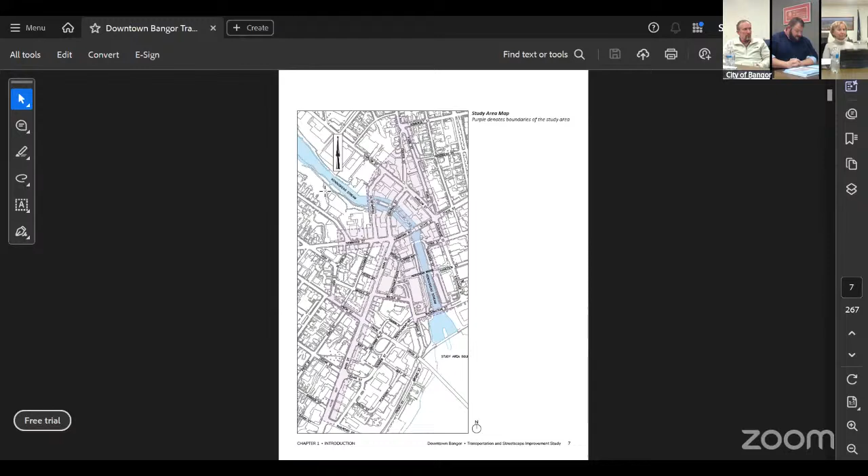I guess what I'm going to do is just do a high level overview, show you what we have discussed, and then show some examples. Can you go to page 31?

I just wanted to show this image, because this is that circular core that Jeff was talking about - Central, State, and Harlow Street, that kind of loop.

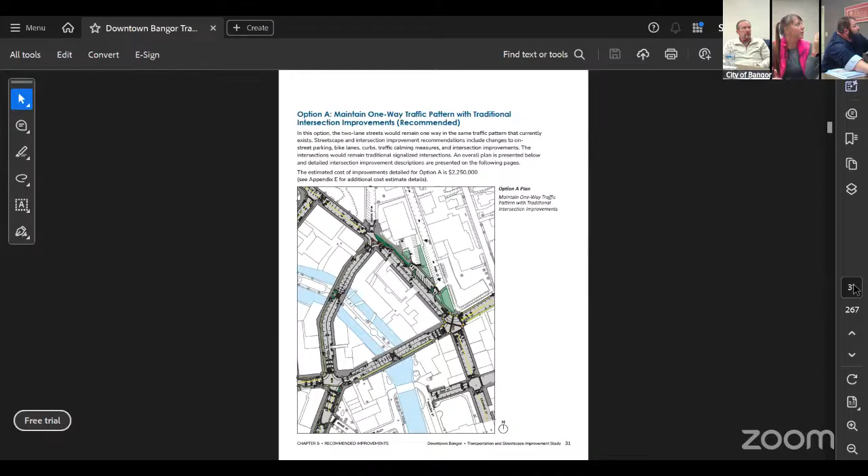In this section, we chose to recommend one-way traffic with the traditional signalized intersections as it is today. With this, we would include streetscape and intersection improvements.

Changing the parking from angle parking to parallel parking all the way around the loop. We would include traffic calming measures, which would be narrowing up the lanes, adding curb bump outs near the intersections.

and near crosswalks. We also included some raised crosswalks along the stream there on State Street and Central, just past Bagel Central. Raising those and having a protected curb bump out area just to increase the visibility of pedestrians, and it also helps the traffic.

I'm sure you guys have driven down there - it's kind of a free for all. Once you turn on Central, everyone's like, what lane do we go in? We kind of stay in the middle until you decide at the end, and then you go from there.

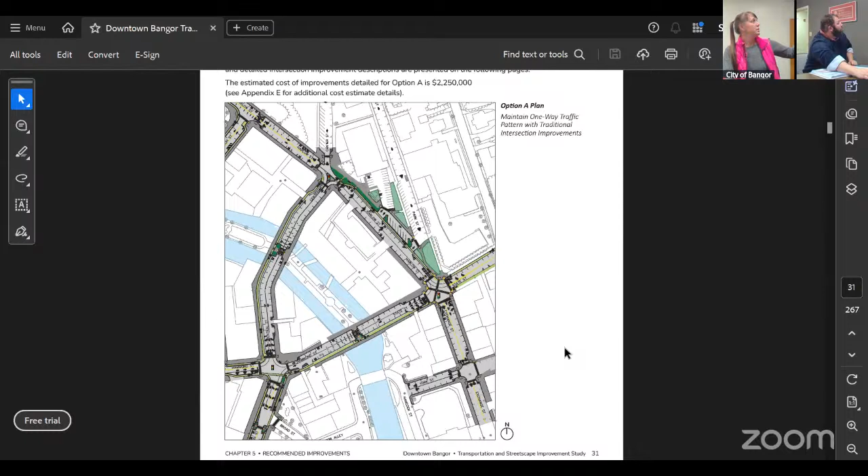So we did that. We also added bike lanes with bike boxes. Bike boxes are at the intersections. The bike lanes are next to the sidewalk, so they're between the sidewalk and the parking. And then we'll have a bike buffer in between the parking and the bike lane, for door swinging, to give the bikers a little bit extra space, plus people pulling into parking.

Those are bike boxes - it goes in front of the intersection so that the bikes have an opportunity to get out, make their crossing, and get into the proper lane on the other side, into the bike lanes. We also proposed some bike racks strategically placed downtown.

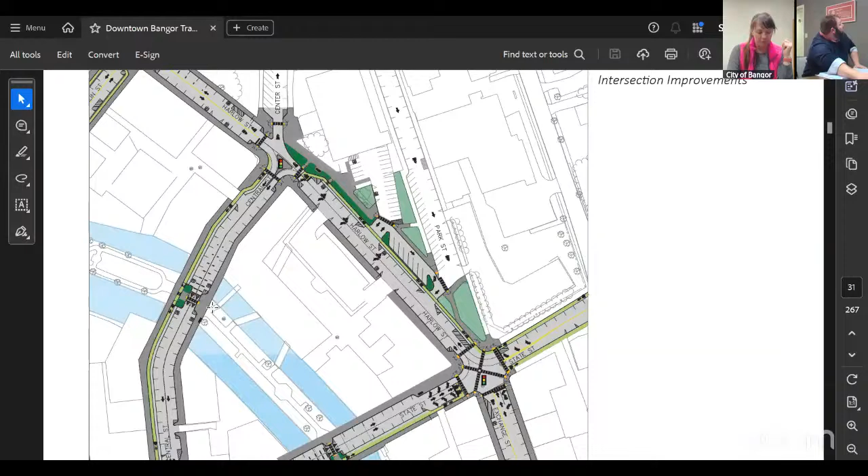What else did we miss? And then just general intersection improvements, which includes improved crosswalks like the paint or the detectable warning fields, if they need button replacements, things like that. So let's see.

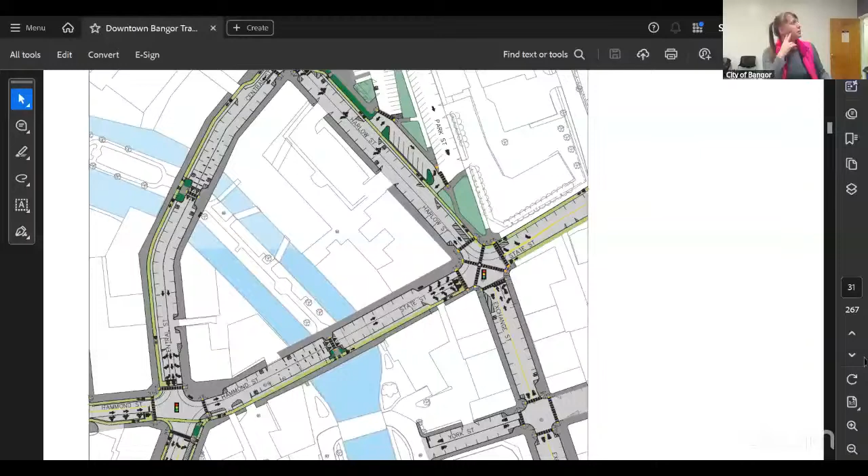Go to page 33 for a second. I just wanted to show the bike boxes like Jeff was talking about, just so you can see those. And then it also shows the curb bump outs a little bit better on this sheet, so it makes those crossings shorter for the pedestrians, instead of being wide open.

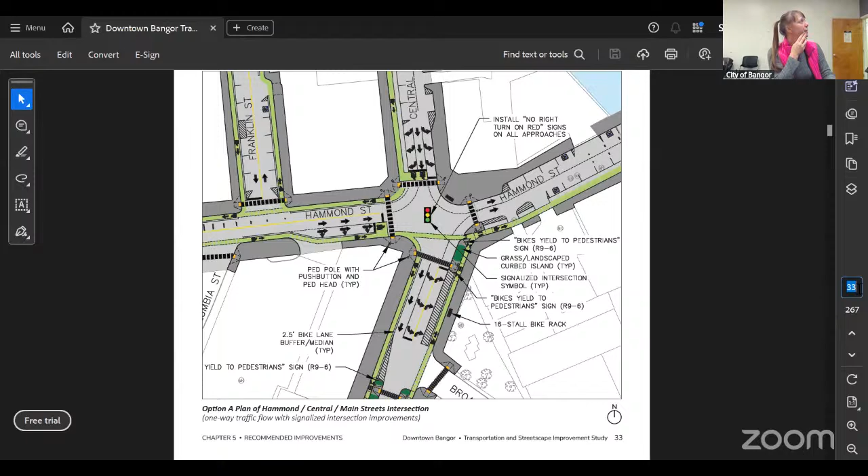Let's see, if you go to page 46, this might be similar but let me give us a better idea. So then we said we're going to do intersection improvements - this is beyond the circular core. We just listed the intersections on this page, and had some photos of some of the select intersections that we did. Again, it's the curb bump outs, the crosswalks, detectable warnings, adding crosswalks, having the bike lanes with the bike boxes. So it was a similar trend all the way through.

And then if we go to 47, I was going to highlight that, which is just the next page down. Oh, I can do this. Nope.

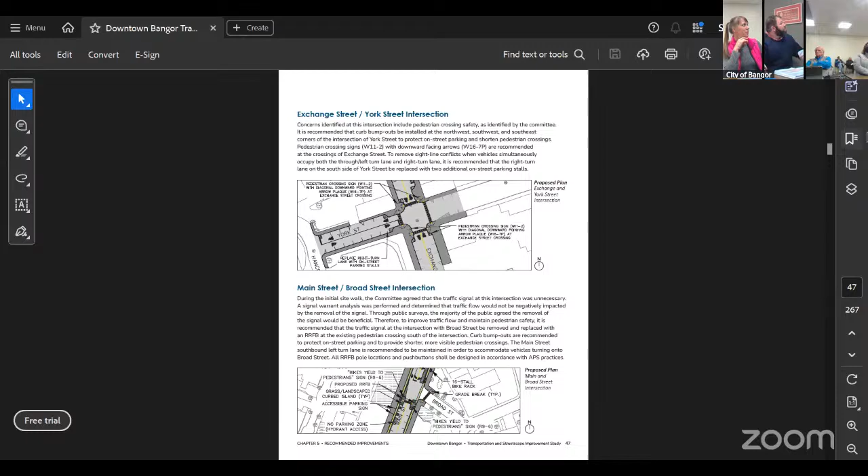I just wanted to mention the Main Street and Broad Street intersection. One of the recommendations here was to remove the signal there, but keep the pedestrian crossing and do the RRFB - that's the push button with lighting crossing for pedestrians. That'll be on Main Street with the push button, eliminating the signal for Broad Street, but still keeping the left turn lane so people have a place to wait while they want to turn. The traffic is pretty low on that street, mostly just people looking for parking or deliveries during the day. So that was the recommendation for there.

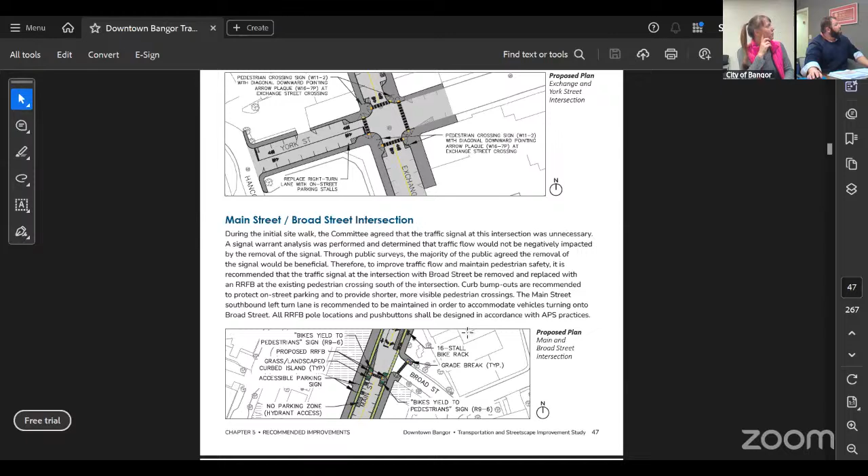Let's go to 49. I think if you go 1-to-1 and then hit the arrow button down.

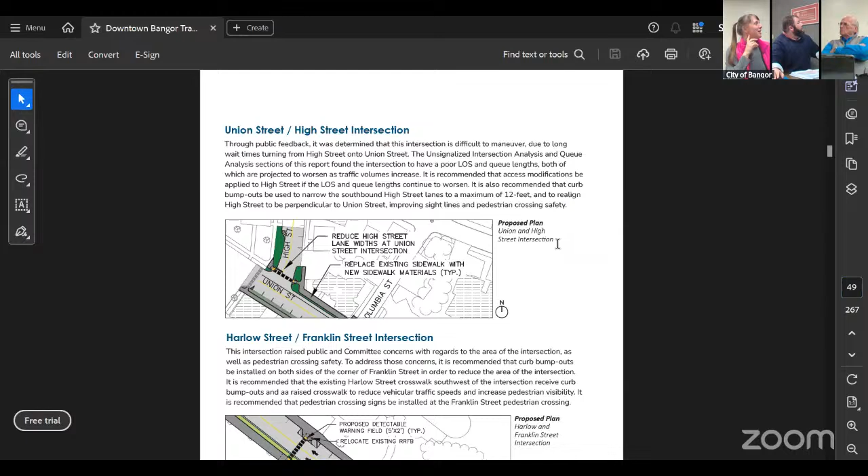So I just wanted to look at Harlow and Franklin. This one is very similar. The crosswalk, I guess on the east side of Franklin and Harlow, we were proposing to have a raised crosswalk there. Yeah, right there - that would be raised, and also narrowing up this intersection with those same curved sidewalks, basically extending the sidewalk. Because if you remember that intersection, it's pretty wide open and people can get going pretty fast around those corners. So that's what we were proposing, along with the bike boxes, bike lanes, and a couple of crossings.

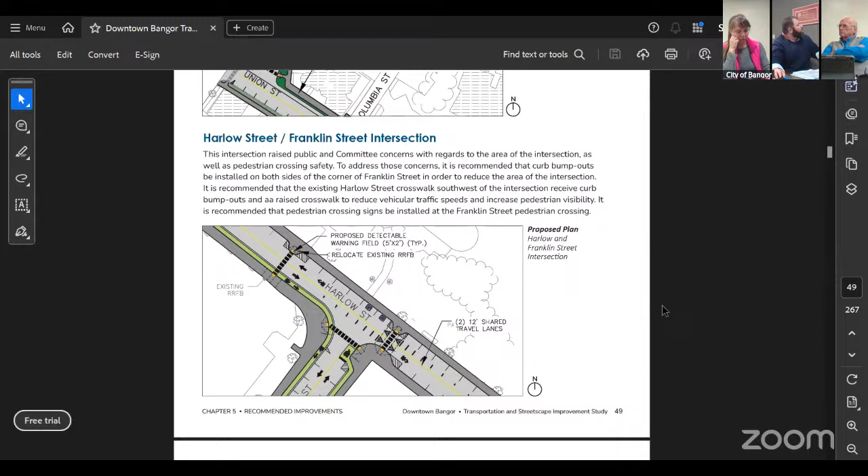And then I was going to show page 51.

So this was another intersection that we looked at - Washington Street, Broad Street, and I guess it's Independent Street or something. Right now it's kind of wide open, but there's some sightline issues, a lot of bus traffic that goes into the station there, and the parking garage is also through there. So there is a lot of traffic and congestion, poor visibility, and concerns crossing for pedestrians. People said they felt unsafe at this intersection, and there is quite a bit of pedestrian traffic going down to the waterfront and also coming up Washington Street.

So we did recommend to keep the traditional signal. There's a right turn slip lane kind of going there, so we did say to get rid of that and just have a grassed area, and that's where the sidewalk comes up through. Then improve the crossings with paint and detectable warnings, and add the sidewalk. That green space would also probably get rid of the hedges that are right there as they come down over the hill, which blocks the driver's view. So that's what we had proposed there.

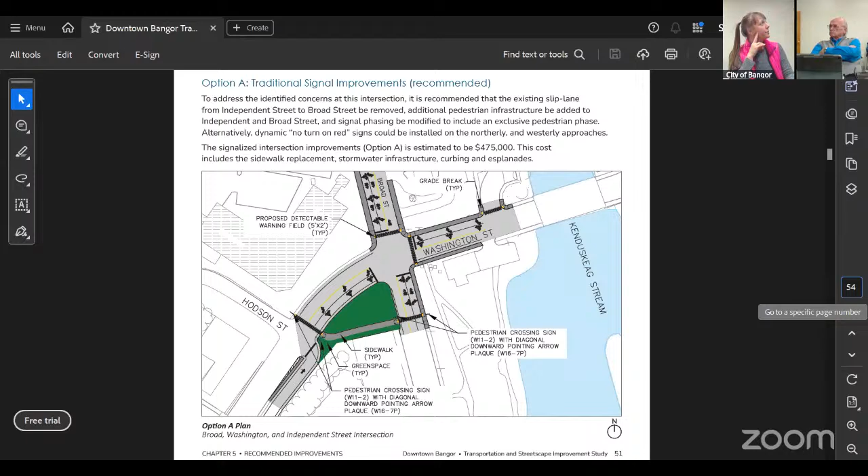I guess go to 54, please. So this one I just wanted to bring up - bike infrastructure was a big part of the study.

This page just lays out a map showing - we used a couple different things. We used protected bike lanes or separate bike lanes, which have a dedicated bike lane, a buffer, and then the vehicle traffic. We also had shared bike lanes, which is the bike in the lane with the vehicle. Those areas we did try to reduce the number of shared lanes that we had. We preferred to have the protected bike lane - I think most users prefer that. But we wanted to show this map showing where we are proposing the protected bike lanes and where the shared lanes would be. The protected bike lanes are the solid line, and the dotted line is the shared.

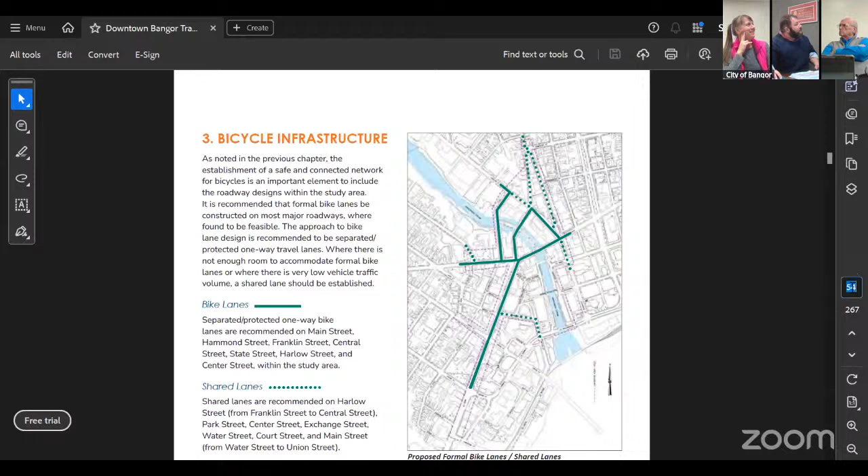So that's within the study area. And then you could go to page 55 or the next page. All right, let's go down a little bit so we can see the cross sections.

I just wanted to show this cross section. The top one shows the two-way traffic, where we have the two-way traffic, the parallel parking on each side, the bike buffer medians, and the bike lanes and sidewalks. So it just shows that build out of what we're proposing. In a lot of areas downtown, it was wide - there was kind of a more efficient use of space we could have, I guess.

So that's what we're proposing, and the bottom cross-section shows the one-way option on Central Street. It has two lanes going one way, parallel parking, and a median on one side, a 5-foot median, and then a 5-foot bike lane. So bike lane only on one side, just to keep those people in the same direction. Once they get to two-way traffic, they're still on the correct side of the road and don't have to go back and forth. So that was the thought behind that, and obviously keeping the sidewalks on each side.

This was just in case folks are confused with the photo - this was if we went the two-way option on Central Street, and this is keeping it one way. That's the image in the background, and the cross section is still what we're talking about with the two-way traffic.

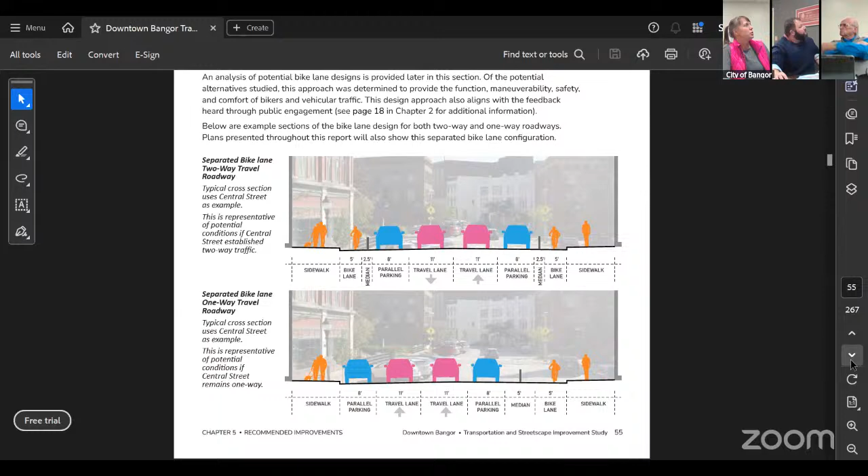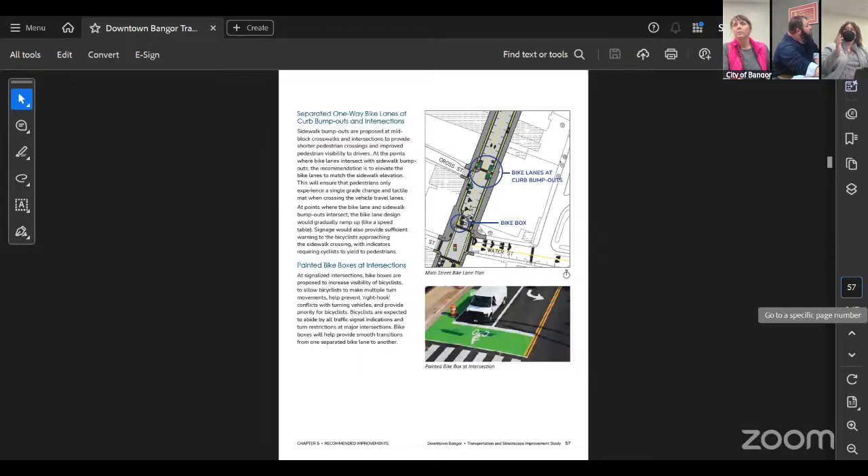Question - if the bike lanes are 5 feet wide, and you have 5 feet and then a median and then the road, what does that do in terms of plowing? Are they going to have to run the sidewalk plows down through the bike lanes? Or is a regular city plow not going to get through there if you have a median or bollards?

It does kind of depend on what that treatment is for the bike buffer. We've discussed several different ways, but it's going to depend on how the city wants to maintain that. If they want to do planters that they pull out and in the winter put them somewhere else, then they plow the whole street, or like they expressed, they didn't want to move stuff - they wanted whatever it was to stay.

This is why we have Aaron involved with this sort of stuff. Outside of this project we've had discussions with Public Works on protected bike lanes and how we would maintain those, because it's just something we haven't done yet. We do have some sidewalk plows, but those really aren't geared for a lot of this - those are an option. Again, this is high level stuff. We haven't had all the discussions we need to have moving forward. If we go this route, it's more resources dedicated from Aaron's group to plow these in wintertime.

Do we plow these in the wintertime? We understand that there are some discussions that need to happen, but this is just the initial step of the feasibility study saying okay, this can happen here. It's just that things have to fall in place. So Aaron, if I'm wrong, please... No, I don't know if you want me to.

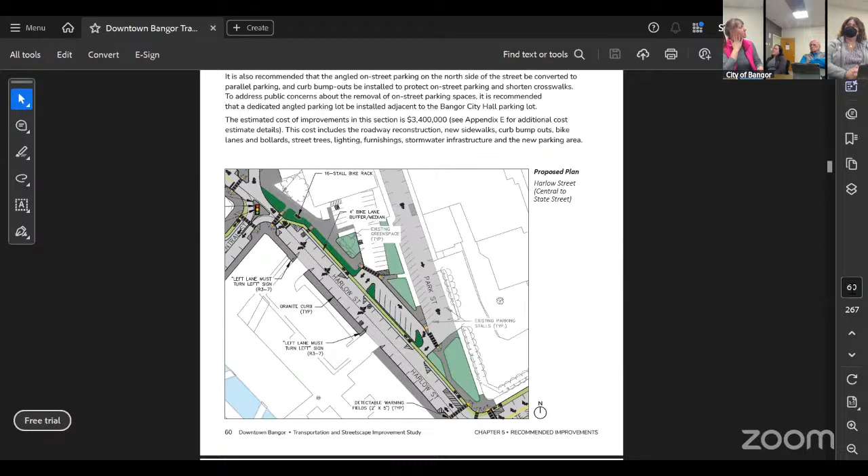So this was Hammond Street, like this is looking going down the hill. I was going to show this because we had proposed a speed table at the crosswalk that's there. That one seems to have poor visibility. That's two-way traffic, and then again, parallel parking with the bike buffers, bike lanes, and sidewalks. So that's kind of how that street expands out.

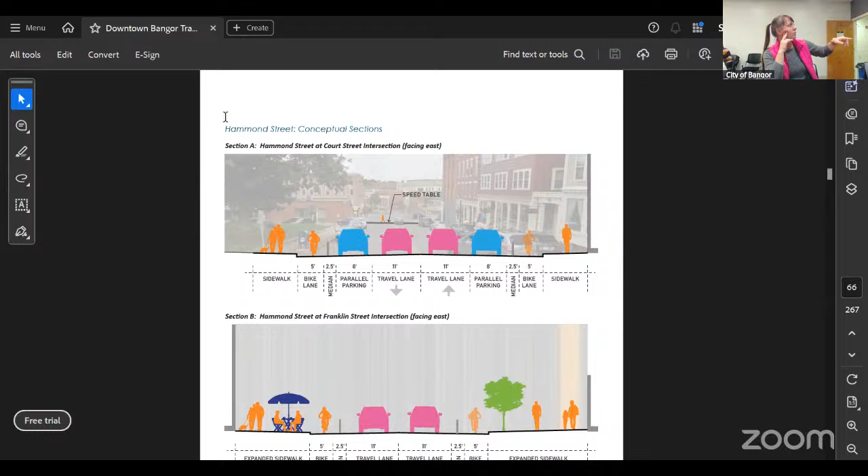And then another cross section that's a little bit lower down on Hammond Street as well. You can see where the sections are on that bottom map. That one, we expanded the sidewalks to narrow up those roads, while keeping the bike lanes, bike buffers, and travel lanes. That's going into the downtown area, which might give opportunity to do stuff on the sidewalks for businesses in that area.

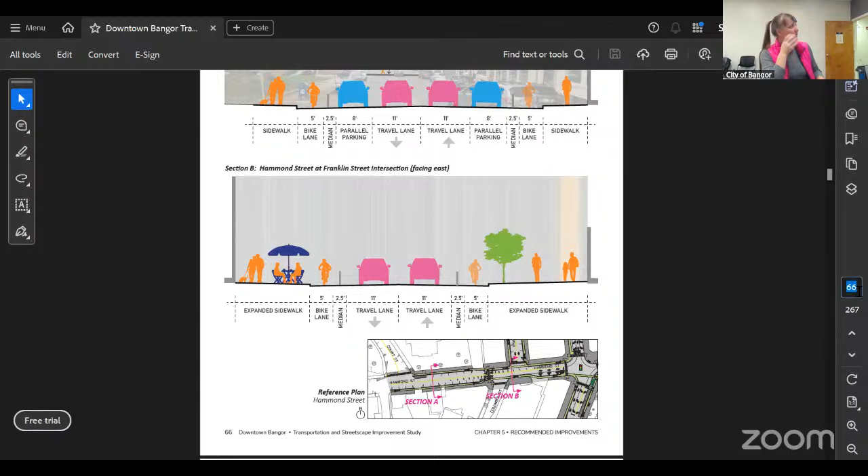And then we were proposing to do like a shared use plaza, so everybody, bikes, pedestrians, vehicles, kind of all share the same space. It's usually a curbless situation, and then maybe they have different materials designating different areas.

If you go to the next page, 76. Not proposing closing Broad Street? Not proposing to close it. People still need it to access the businesses, to do their deliveries. There's a small amount of traffic that does need to go back there.

But I think giving it a new look gives the city opportunities to close it down, like if they want to do it on a Sunday or over the weekend and do sidewalk sales or art festivals. It would give them a space to do that.

And then it gives pedestrians just kind of free walking space, and bikes could go down there too. I think with changing the materials and the look of it, vehicles, not that they're not going to feel welcome, they are going to feel welcome, but they're going to know they're in a different space and they're going to change how they're using it and driving. At least that's what we have found.

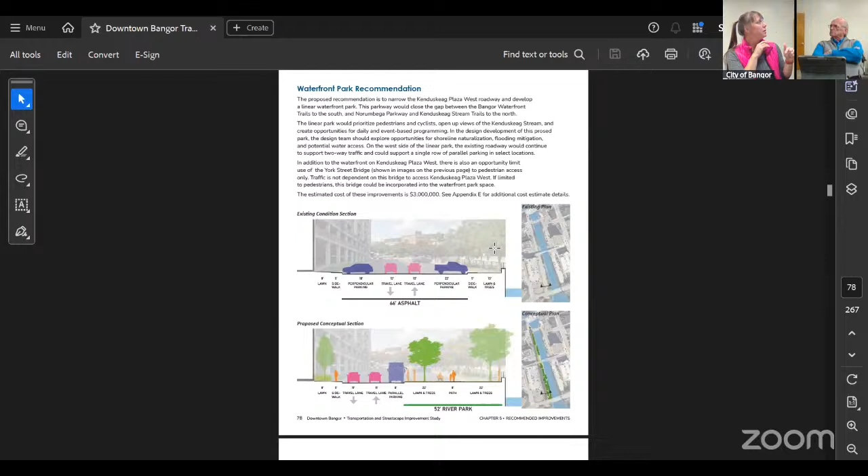So we wanted to basically create a space that enhances the waterfront and is usable, getting rid of the unused pavement. So the next one, 79 I think it is. Yeah, so that one has the cross section of it.

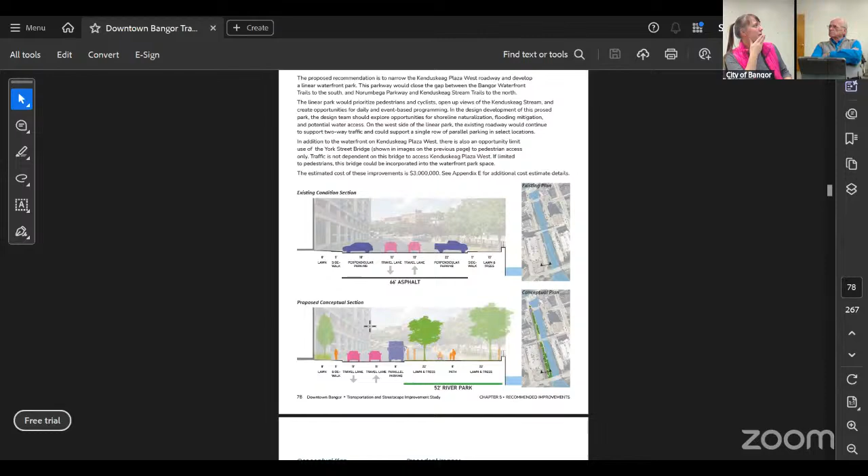It lends itself to opportunities for potentially getting a more natural stream shoreline, and also potentially space for flooding mitigation and even water access, because that's one thing people have mentioned too, water access down there for kayaking, boats, small boats, and stuff like that. So that would be the waterfront park.

And then on page 81, we just go over materials, gave examples, and the city is just saying choose materials, be consistent, so it will look nice, and you guys have a lot going on in your downtown. So we just threw out examples of planting, sidewalks, lighting, things like that, and then I think it was page 84, just wanted to highlight the public art, which it sounds like you guys are already working on with the trash cans.